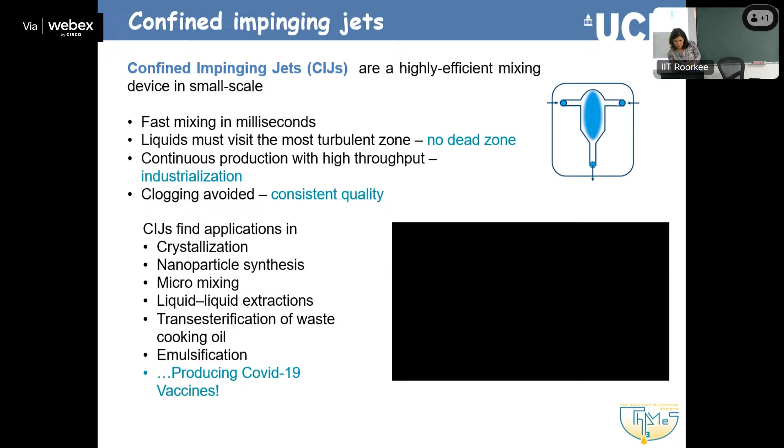Okay, yeah. I hope it doesn't change on its own. Yeah, scale out, number up. So we have one channel, it works perfect. Let's use a lot of those. Any problems there?

So this is important. That's how people used to do scale up, try to keep some sort of similarity between the processes. So if you now have your small channels, one way to increase is what was mentioned, that you use more of them. And the issue there might be, somebody said, if you try to just use many channels, what is an issue? Flow distribution. How do you make sure that your flow, on paper, I can say every channel has the same flow rate, but in practice, how do you do that?

The other approach I will argue for as well is to actually increase the channel size. If you are looking for analytical applications, you can go to sub-millimeter channels, even smaller, because this is good, you reduce your sample volume. But if you want to think about production, there's no reason to go sub-millimeter. Actually, there are very good reasons not to, because you might have some dirt, some impurities, and confuse the results. And I showed you this graph before where we had the mass transfer coefficients for 3 different channel sizes.

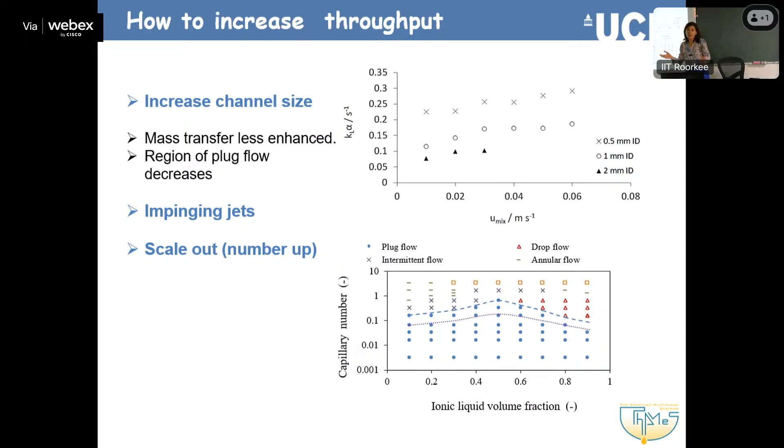So basically, impinging jets is something we have started working on. Impinging jets have been there forever in fluid mechanics, usually in unconfined spaces where two jets collide. And then as all these microscale things started coming up, people have started limiting the space where the jets collide. This is how we work—we work with confined impinging jets. What you get there, as it shows here, is very fast mixing.

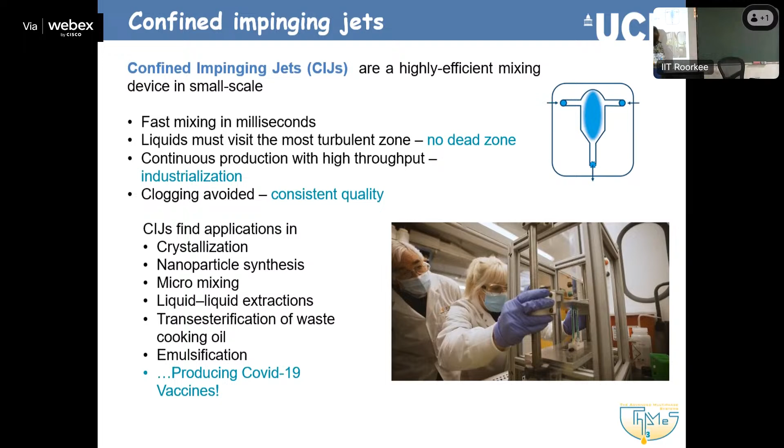Very quick, very fast mixing. And because of that, there have been applications in mixing—first of all, fluids to fluids, crystallization, because you get very good mixing. You have nucleation happening, crystals forming, nanoparticle synthesis, which is related to crystallization, and so on. And we have used it for extractions.

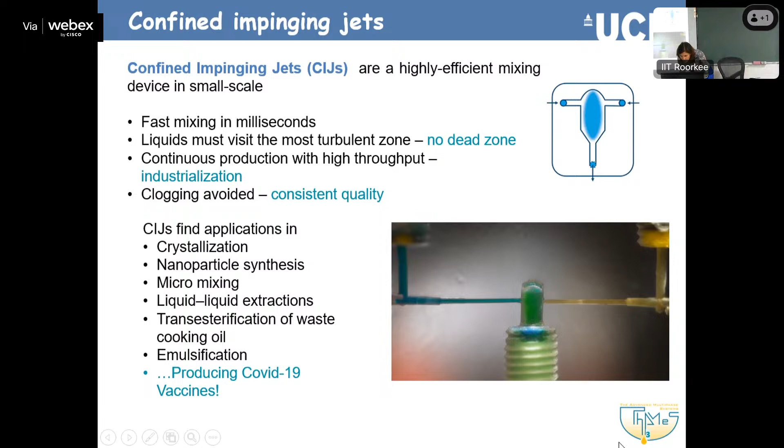Okay, so if you want, this is a cool video. I can give you the reference as well. So this is our impinging jets, and this is the first generation, let's say.

And as you can see, it's a very simple setup, what we did in the lab. This was done with acrylic—that's our impinging jet here. And if you have some 3D printers, which is more common these days, you can also 3D print that. But in the end, we just connected those two channels.

Our first generation has this type of configuration: a T-junction where your side channels are very small, but the main channel is relatively bigger. So the fluids come in with quite a big velocity because they are in very, very small channels, and they impinge.

And because of that, that's the type of flow we form—we form dispersions, coming back to your drops. But now we work more with these symmetric impinging jets, because with the earlier ones, the mixing had some dead zones, so we thought we would try these ones.

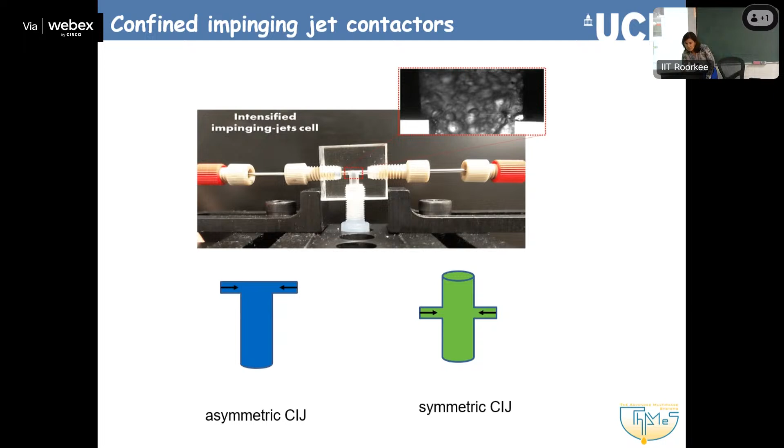So I think I showed that to you before when we were discussing the different measuring techniques. This is the setup we are using for the impinging jets, and this is the actual geometry of the symmetric impinging jets. Again, we have the two side channels here, they collide here, and then the mixture comes out both ways.

And some properties—we've played a bit with this inlet diameter size. We've gone down to 0.25, and with this outer tubing size. So the inlet ones are the two jets, the outer is where the jets are, these two side channels, and the outlet is the main channel where we want our reaction to happen, or separation.

We use 2 millimeters because I come from large scale flows—I've been working with oil-water flows at large pilot scales. One thing you have with two liquids is a lot of liquids, and if you start using solvents, that's a lot of solvent you have to deal with. With these sort of systems, because the velocities are bigger, we start having a lot of fluids to handle. So if it's not necessary, in this case we put the tubing small, because it means we have to handle less volume of fluids, which is important.

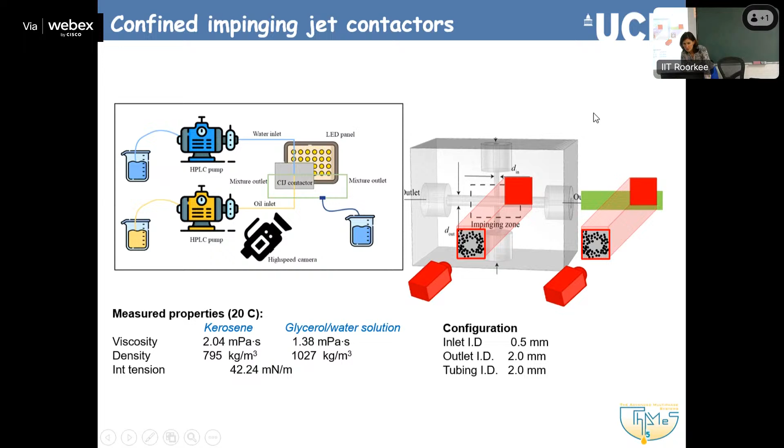Again, very briefly—these are things you find in the literature. The thing is that we did a flow pattern map. In this case, I think we used some glycerol in our water—we had kerosene water with some glycerol, just to remove some of the reflections. So we were able to improve the images a little bit, and you get all these flow patterns again.

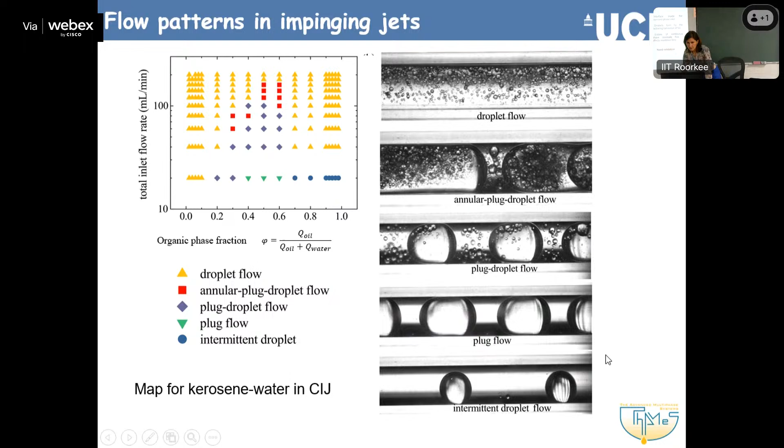The one we really want to work with is this droplet flow, or some variations of that. And we are trying to do some studies of these flows. Yep, and that's what you actually get in the impingement zone.

What we have here, and the reason is to aid visualization, is that we have the aqueous solution coming from the jet underneath, and the organic solution coming from this jet. We have a lot less organic phase, and the only reason is so that we are able to see and take some images and videos.

Because if you increase the organic phase volume fraction, it's very difficult to see. That goes back to what we discussed about imaging techniques. Imaging is marvelous, but once you start having interfaces, it's very difficult to see what's going on.

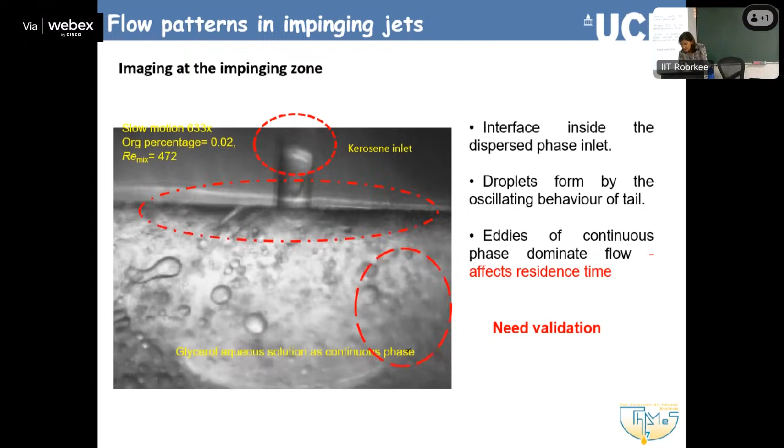So there are various phenomena. This is very interesting for studying how the mixing happens before we move on to study the separation. It's very difficult to actually see what happens with imaging, so we had our hand at trying to do some modeling, and there are modeling people at the back who may be able to do it better.

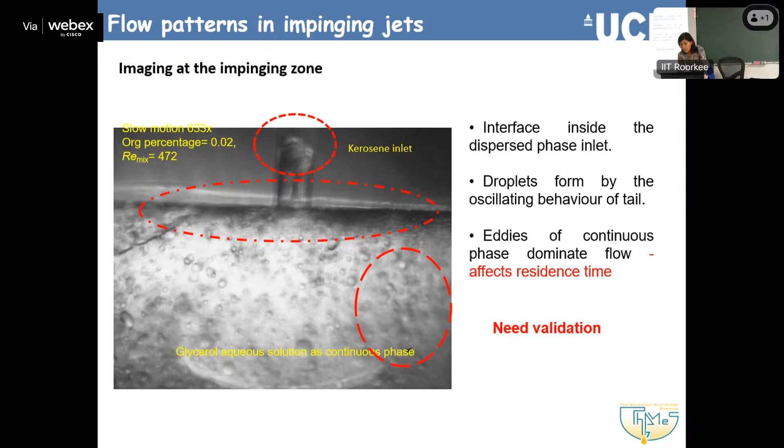We did use tools available outside, and we used CFD which combines volume of fluid with discrete phase modeling. What we found is that this phase comes in, the other phase hits it, spreads, creates a thin film, and then from the film the drops escape and break. So basically we have this sort of configuration.

We have the aqueous phase coming here, colliding with the dispersed phase, the kerosene. It spreads it out, creating all these thin ligaments from which the drops eventually break. So there's a lot of physics to study there, actually.

But to model it with CFD is kind of tricky, because you model this part using volume of fluids. If you're not doing CFD, we'll talk a bit about that today and tomorrow. But then what happens? You can stick with VOF, but then it gets to be a very demanding simulation - you need very good resolution, very fine grids, etc.

That's why it's good to bring in a different type of model, the discrete phase modeling, that can handle the dispersed phase better. Of course there are assumptions - you have to decide when you move from the VOF to the discrete phase modeling, but it's doable, and we've got some results.

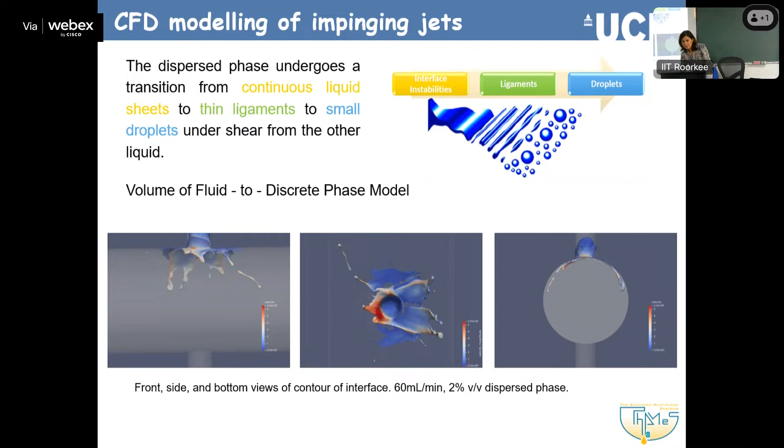They can be done better, but I think it's good enough to show some of the phenomena that are occurring. It also shows exactly what I was describing before - you have the continuous phase coming in, colliding with the dispersed phase here, and here it is as a velocity field, but that's what happens.

So this is the movement of the flow that stretches the dispersed phase. With CFD, you can take images wherever you like - it's not like the camera that's fixed in one position. So this is what happens at the colliding zone, at the mixing plane, and how that changes if you move further away. Nice images.

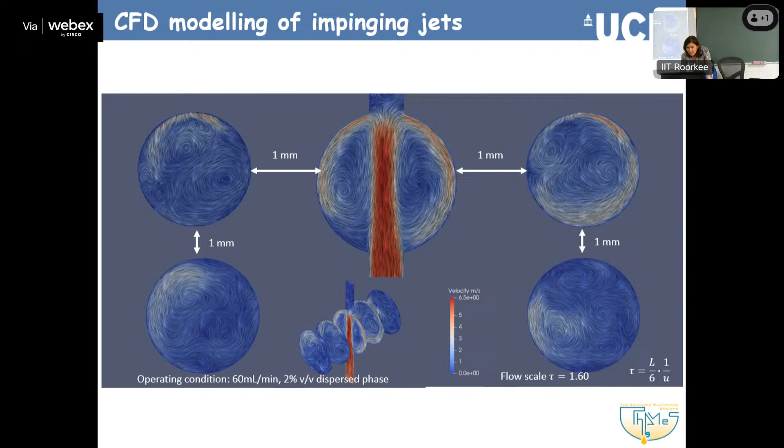So we got some results as well, and we were not terribly unhappy. I think I have some comparison - maybe I should mention the comparison first and then go back to the results. So we did drop size distribution measurements with the CFD, measuring the drop sizes that CFD gave us, and also from the experiments.

For safety, we didn't allow breakage after this impingement zone - after the first drops broke, we did not let any other breakage occur, we allowed only coalescence. There can always be a question of how small drops you can measure, given the quality of the images, because we don't match a refractive index.

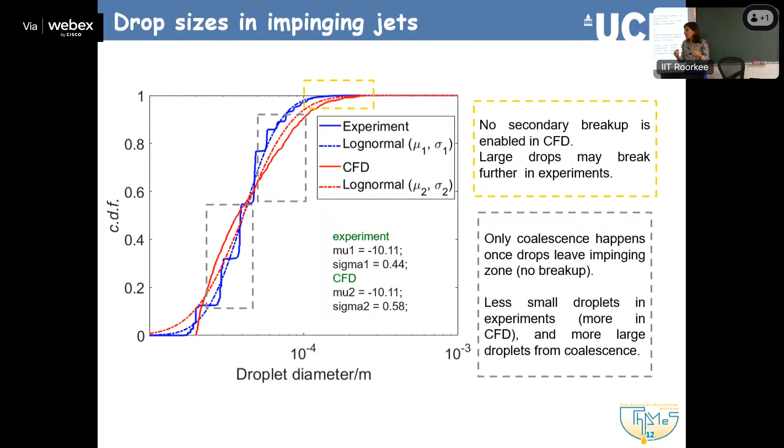So if people are interested in the hydrodynamics, the fluid mechanics of this configuration, it's a nice problem.

I showed you this graph before, but it just shows how the jets work. Here we change the velocity, the total velocity at which the two phases collide - that's how we define it. And what we get is, as you would expect, as your velocity increases, your drops get smaller, which is good because it increases the interfacial area.

The other effect we discussed a little bit is that when we use a very small or a very large fraction of the initial dispersed phase, we are swapping which phase becomes the continuous phase, which again is expected.

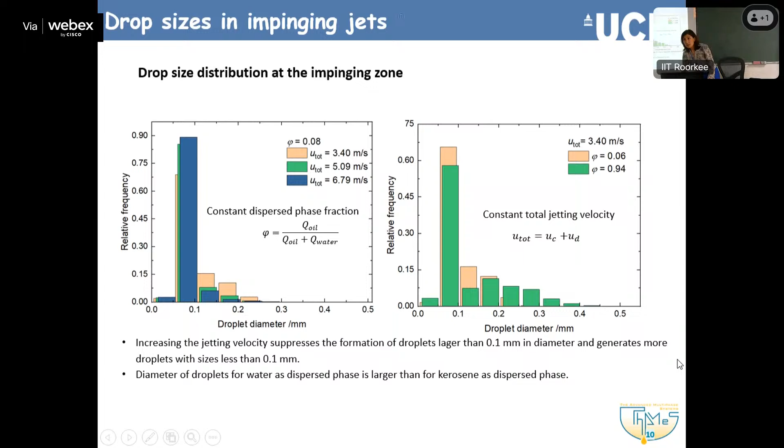In all these cases, because we wanted to do that with imaging as well, we really needed to stay with low fractions of the dispersed phase, otherwise we wouldn't be able to see anything. But then again, in that system, we also use ultrasound probes later on to get some information at higher volume fractions.

Some more results on the average drop size. Are people familiar with this way of defining average drop sizes, the Sauter mean diameter? So this is one way to define drop sizes: you use the cube over the square, the sum of the cube over the square diameters of all your drops. There's also the arithmetic mean drop size. Various ways to compare drop sizes.

And we have, again, the average drop size with the total velocity. As you can see, we start D32, for example, from 200 microns. It can go down to, what is that, 50 microns. And also the interfacial area, because this is what we want for mass transfer. I've shown you that.

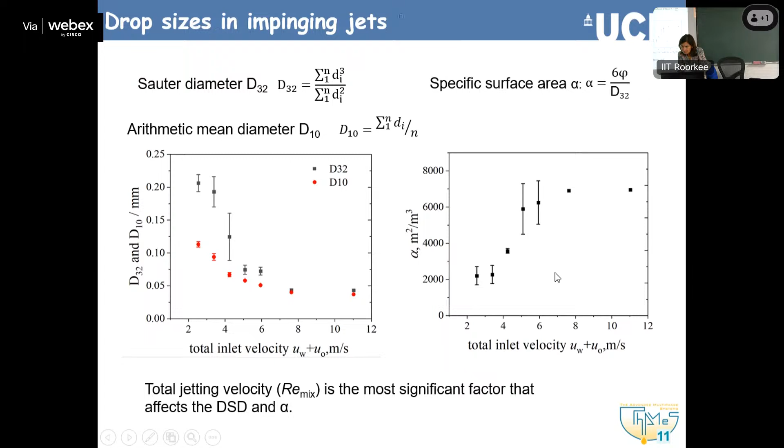I would say in this system, at the moment, in this system. Because we haven't looked at different fluids, you know. But once one of them becomes a limitation, it could go smaller. It's not a limitation, it's not... unless there's other benefits, there's no point, because higher velocities mean more power input for pumping. So if there's no reason to go faster, why go faster?

Will we gain out of going faster? I don't know. Probably nothing, so there's no point to go faster. It would be, yeah, exactly, the whole pumping... So yeah, exactly, you can get information like that - really you're not gaining much if you push your system.

Okay, so this is the impinging jets. We said there are three ways to improve the throughput: one is to just make the original channels bigger, the other is to use impinging jets - so in this case we make our fluids flow faster when they join in the mixing zone - and the third is to actually do the scale-out that we were mentioning.

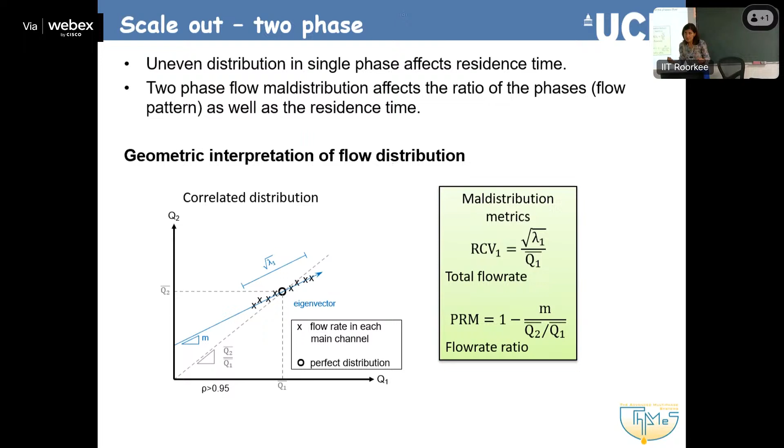So there is an extra complexity compared to the single phase flows. We decided to go with this approach. This is something we have developed in the lab.

Kind of makes sense. So we have one channel, one inlet for one phase and one inlet for the other phase. We split them as many as we like, each one has a manifold for the single phase, and then we join these single phases. Here is a picture that we did - it makes it work, kind of works. I'll show you some results, we've done that with dye, and you can see we managed to have plug flow in all the channels.

Just for terminology, in all these cases we again applied this resistance network, but we had to worry about three resistances this time. Before we had the main channel and the reaction channels. Now we have what we call the main channels, one for each phase, the barrier channels or sections where we have split the single phases, and the reaction channels, the red ones, where we actually bring together the two phases.

So we have to worry about all the resistances that go in. It's long - there is a paper on that you can have a look at - but by using these laws, every connection point, the flow rate should obey mass balance. So what comes in here as Q1 should equal this one and this one flow rate. Also in each loop, the resistances, the pressure drop should balance. You can have a system of equations that can be solved. It's not as difficult, we just need to go through it systematically.

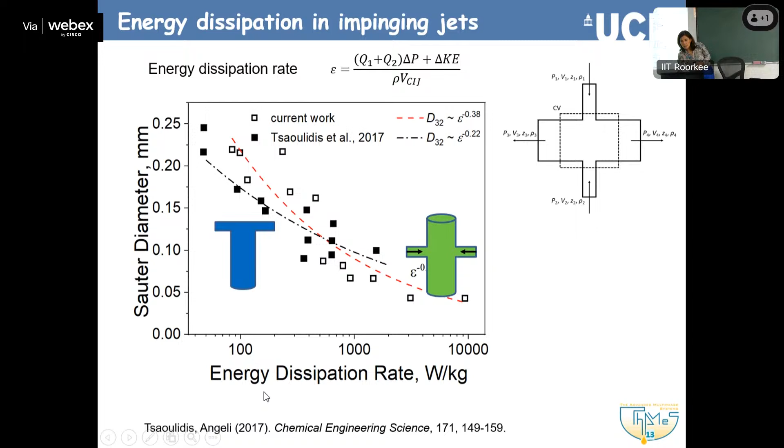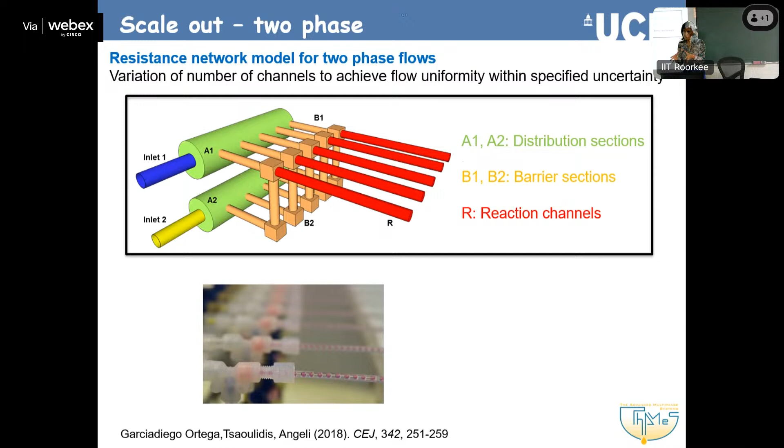You can do that with tubes. If you want to have anything tapered, then of course your fabrication becomes more involved. It's not impossible, it actually might be, depending on the size, quite easy with printing today. Just bear that in mind - it's not good, it's not bad, it's just one thing to consider. You can do it because the model can accommodate these things, these resistance network models can accommodate these things. The example is that the resistance in this part is not the same as the resistance in this part.

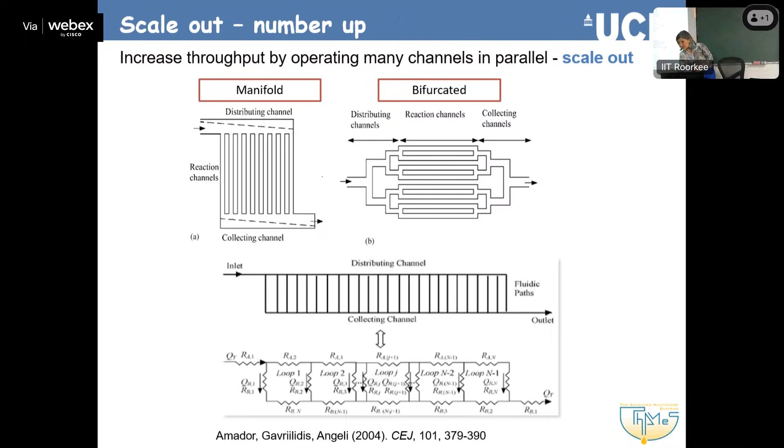And actually finding resistances - so with this model, what you do is basically calculate resistances, which you then interpret as channel size, because you have certain fluids. So what the model finds for you is resistances, and then you say okay, this is the resistance - the frictional pressure drop. The pressure drop is the flow rates and some friction factor effectively, which is the resistance, which includes the channel size, the flow velocity. So you can have different geometries, and you work backwards - you first calculate the resistances that will give you the distribution, and then you work out back to see what the geometry is there.

What I wanted to show you is very, very quickly some considerations as well. Let me see, just to connect it nicely.

So then what happens is more like design considerations. We wanted to have a manifold for the lab that had 5 channels. We made one for 10 channels, but we're not using it so much because, as I said in the beginning, liquid means you have water, but you also have an organic. Organics you need to recycle because you cannot just put them down the drain, which means you have to start worrying about holding fluids, keeping them. So the bigger, the higher the flow rates, the more fluids you are working with - a manifold of 10 is a lot more volume than a manifold of 5. So we've done a lot of work with a manifold of 5, but it's nice to demonstrate it for bigger, especially for industrial applications.

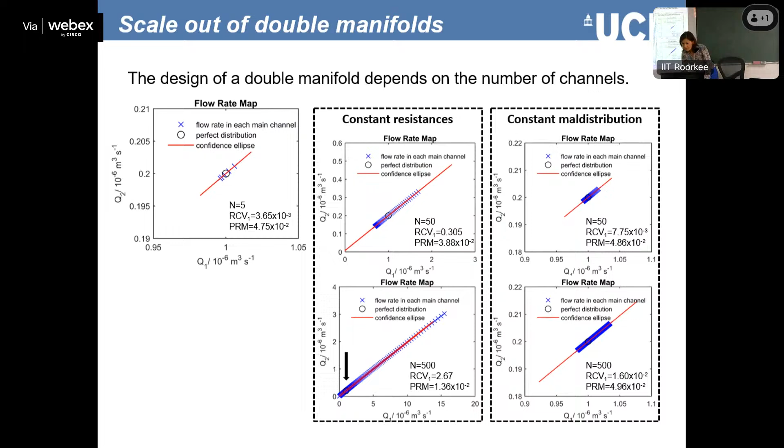So, bringing in pumping as well, I'll explain these two graphs. Again, these are fancy drawings - somebody's PhD was spent on those. It's not something you'd really do in an hour, but it's just the concepts to bring in.

What we did here is try this parametric study. What if we change the channels? How much do we affect this maldistribution? We did that first, and then went to design the one we made in the lab. So we played with the two resistances, the ratios - remember we have the initial channels, the barrier channels, and the reaction channels. We played with the ratios of resistances because it was easier to get them from the model.

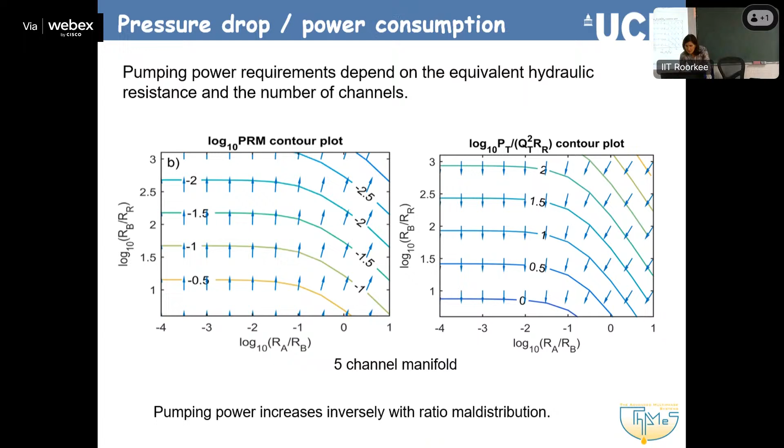Just to show you, we did actually do an extraction in a manifold, and this was with a company - I won't mention the metal here. You can see the flow distribution we got, this is what we got in the 5 channels, the flow distribution for different flow rates. And then we did some extraction efficiency as well, and that's the numbers we got.

And then, again, we started thinking, because it can be a little bit daunting. If you go to industry and say, I can give you a very good extraction, but I need, I don't know, 200 channels - it's kind of not there yet. So what we found is that we played a bit with the metal concentration, because there's a requirement to get 6 kilograms per day of this metal separated. So we played with the concentrations and extraction, because all these things can affect how much you extract in the end - the initial metal concentration in the aqueous phase, the percentage extraction, how long your channel is, what volume fraction of the two phases you use.

We found that we did all our work with 2 millimeters, and found that we needed 92 channels. If we increase the channel size, we need 23 channels. And if we play with the concentrations more, then with a 4 millimeter channel we might only need 7.

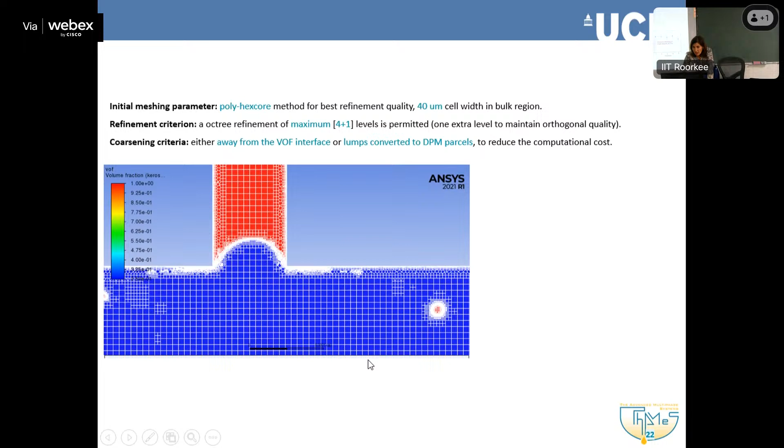That's all - I'm actually quite fast. I wanted to show on scale up. So I'm happy to take lots of questions if you have.

Yeah, anything, we can go back as well. Might have gone a bit quick in the resistance network.

From a maintenance point of view, you have to stand by at least 2 other units. What do you mean, for 2 pumps running? They have 1 pump, pumps is a big issue. Yeah, you need to have spare pumps.

So one system, we managed to destroy actually because we made our initial manifold out of acrylic. Acrylic is nice because you can see through it. I don't know if people have access to a workshop with a CNC machine to do acrylic work. Especially if precision isn't required, there's some very good 3D printing going on, so you can do quite a few things with printing. You have to be careful with materials because these extractions involve acids and oils. This is one thing to be careful of, but we're trying to see if we can do manifold printing rather than acrylic. Acrylic is perfect, but can be quite sensitive to make a manifold like that.

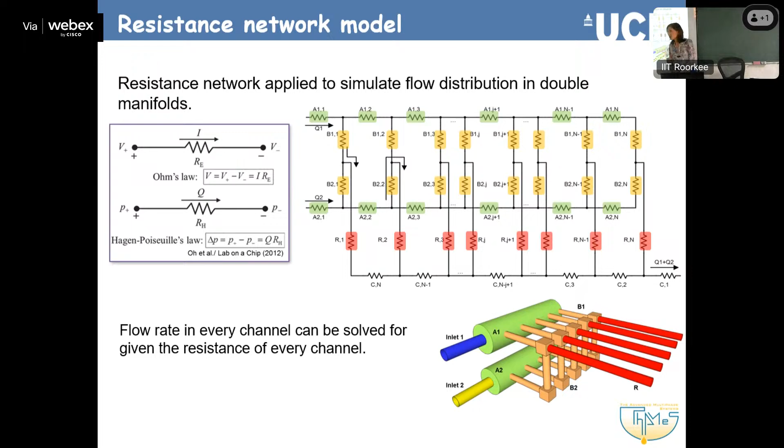So this is the part that we fabricate, and then we use a lot of tubing connections which are very easy to change. We don't do microfabrication, we use tubing connectors, so it's quite flexible in that sense. You can change your tube size to 4 millimeters, like you did the other day in your experiment.

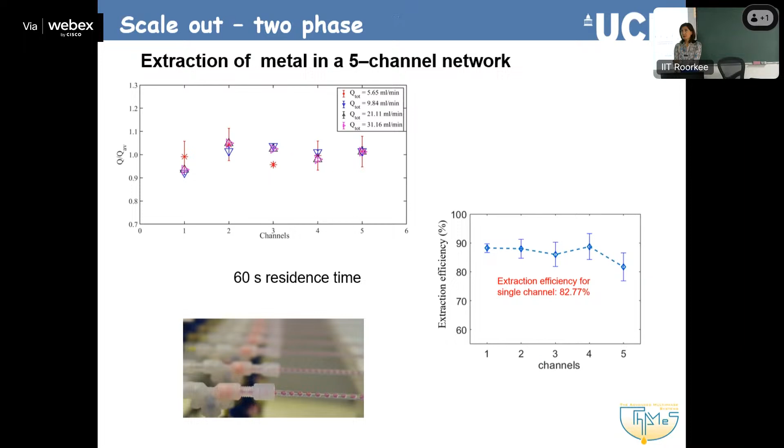So you have to start thinking about the pumps too, because there's always a fine line, like with PIV. You can't do standard PIV if you have a few millimeters or centimeters of tube. If you're below a millimeter, it's nice to do micro-PIV, but there's an in-between that sometimes isn't very clear, where your channels are too small for a plain laser.

Same with pumps here, it depends on the fluids as well. There are syringe pumps used extensively for microfluidics, even if you go to 4 millimeter channels, but then you start talking about bigger pumps, and there's a kind of gap, an area where you have to find the right equipment. It's neither small nor big, somewhere in the middle.

80% extraction, the recovery is 80%. This is not extraction efficiency, it's recovery, so 80% of the metal from the original phase went through.

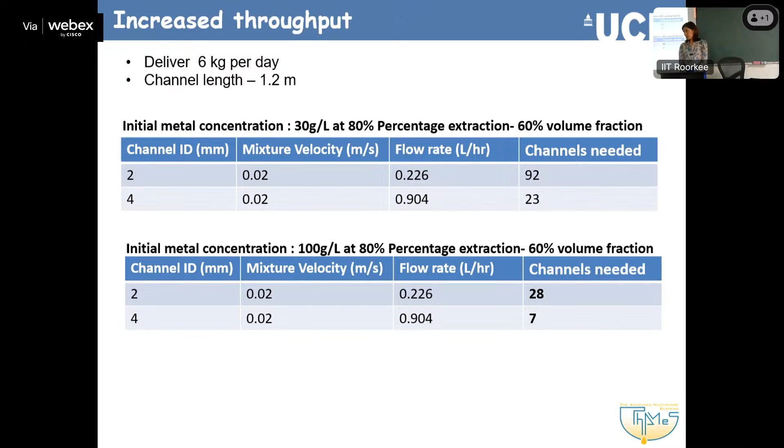So, in that case, how would you extend this low extraction to multi-stage? That's the other issue. I think I showed it a bit in the previous slide, no, here.

There are various scenarios on how you can do this. You might need to go in the traditional mixer settlers, where you take the material out of one stage and put it into the next. You can then feed fresh solvent, or have some sort of counter current operation, so you have to separate them. You might need to scale out as you do in a mixer, if it's not enough.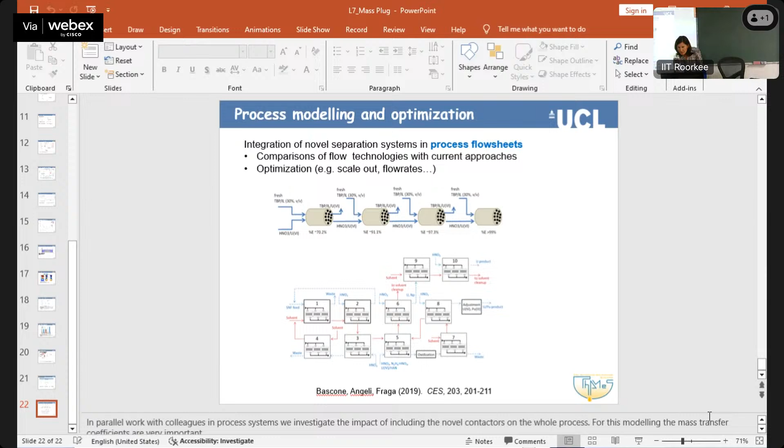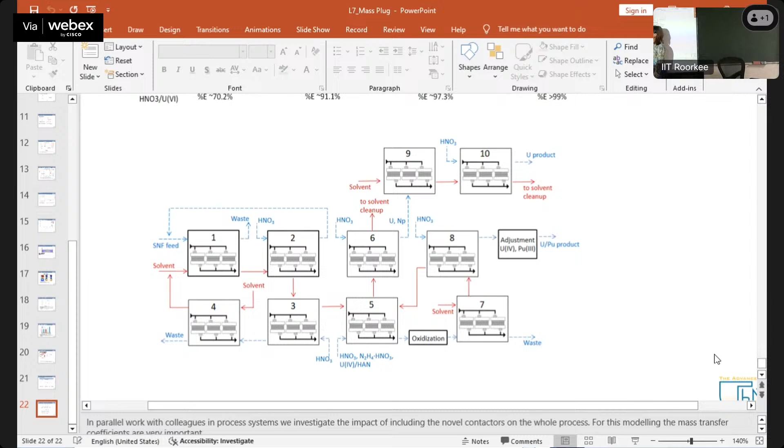So basically what I was showing you here, let's make it bigger. It's all schematic because we're not sizing it at this scale, but basically you have your batteries, let's say, of units of 5, 10 microchannels. Then you may need to remove and separate, feeding either the aqueous phase or the organic phase. Here the aqueous phase goes to the next stage, and you feed fresh organic phase. Or you can do it counter currently, which means this goes this way and the organic phase goes this way. So that's the separation we need for the future.

So would you suggest a common separation, or independent separation, maybe each channel having its own? That's something we have not quite decided yet. It depends, I think you can do both. At the moment we just collect them all because we don't have many separators. You can think either way. I think a common separation of batches of a few is more realistic, but of course you have to account for this resistance into your resistance network.

Yeah, you can do that. There are the separators I mentioned, three different sizes I think. The one we use is the smallest. We plan to go one size up to accommodate like 5 channels together, or the impinging jets as well, because that's higher flow rates.

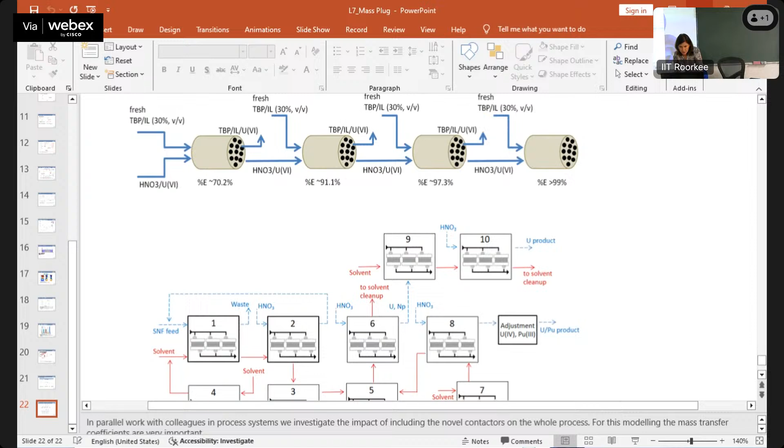Yeah, you can. The thing is to try to check, because with the camera it can be quite tricky. So to get these results, what we did is actually collect it at the end, per channel over time, which is straightforward and easy.

Is there any issue? You have 5 collecting tubes and you collect at the same time. It's okay, it's a good reliable method. It's just that if you want to automate it more and get more information, like plug size and frequency, we are using these light sensors.

But you can think of that with any other sensors. Sound might be good as well. It depends, people are developing conductivity sensors too. There is work happening to investigate this online. Conductivity can also give you perhaps the metals as well, which I know some chemists are working on. So yeah, there are opportunities there, but the answer is yes.